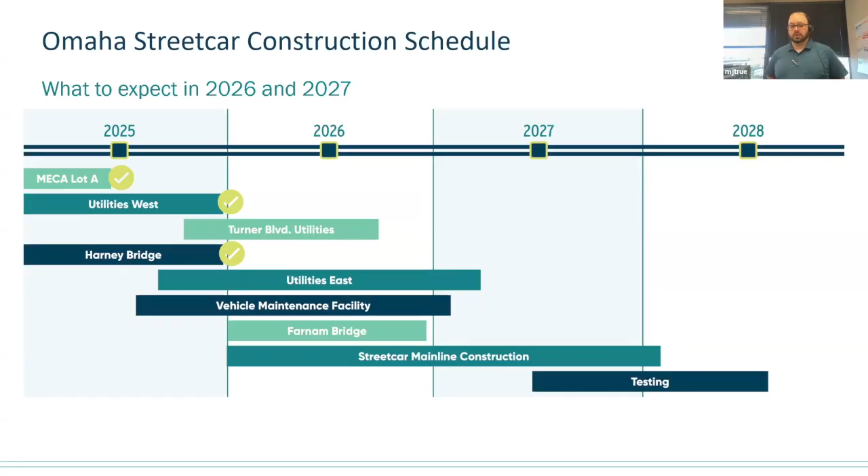So the overall construction schedule, you can see the Harney Street Bridge, Utilities West, and MECA Lot A. We've actually got 3 projects that have now been closed out. And as you can see, 2026 is going to be our busiest and heaviest construction year. You're going to have Turner Boulevard going, the Farnam Bridge going, and the vehicle maintenance facility still rolling right along. Utilities East, this is going to be the bulwark of what they do. And streetcar mainline construction, which we'll get into a little more detail, has kicked off 2 of its headings already as of right now. Towards the end of this year and into next, the actual construction portion will begin to phase out, and we'll be getting more into actually testing and integrating this system and getting ready for opening in Q3 of 2028. And with that, I'm going to be turning it over to Megan Walter with MUD.

Good afternoon, everyone. So, right now, MUD is currently working in Phase 5 along Farnam Street from 19th to 28th Avenue. MUD has completed all gas main installation along Farnam west of 20th. However, a couple of gas services still need to be investigated in this area. The remaining work includes new gas main installation on 20th once other utility work is completed. In addition, gas service work will be performed in the alley south of Farnam between 19th and 20th to relocate a couple of services off Farnam away from future streetcar tracks.

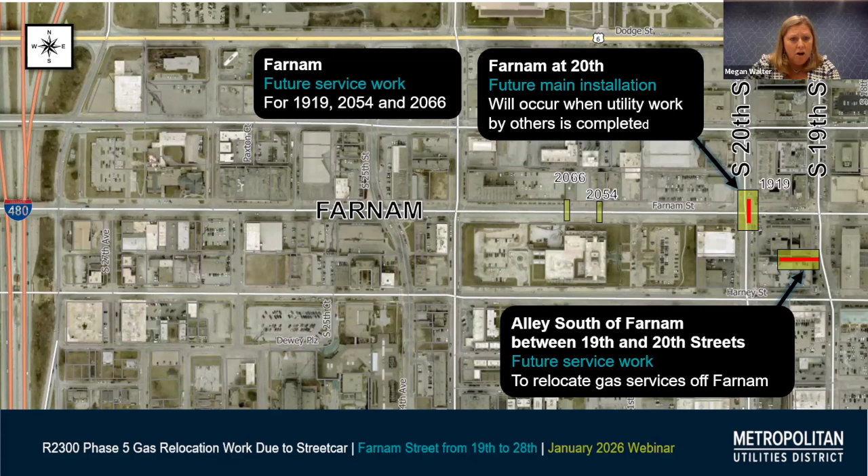Our next slide is related to Phase 8 in the Turner Boulevard area. Our crew has completed work along Harney Street and Park Avenue, and the city has poured the remaining concrete in the area. Traffic control will remain in place until work for one additional service is completed near 29th and Harney. We have two crews installing new gas mains in Farnam Street at Park Avenue and at 30th Street.

We anticipate this work to be completed within about 2 weeks. So the traffic control is in place. However, traffic in all directions continues to flow.

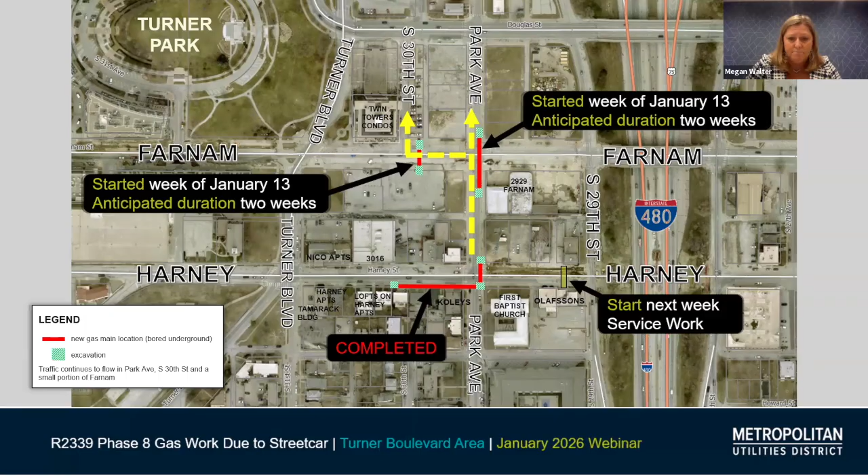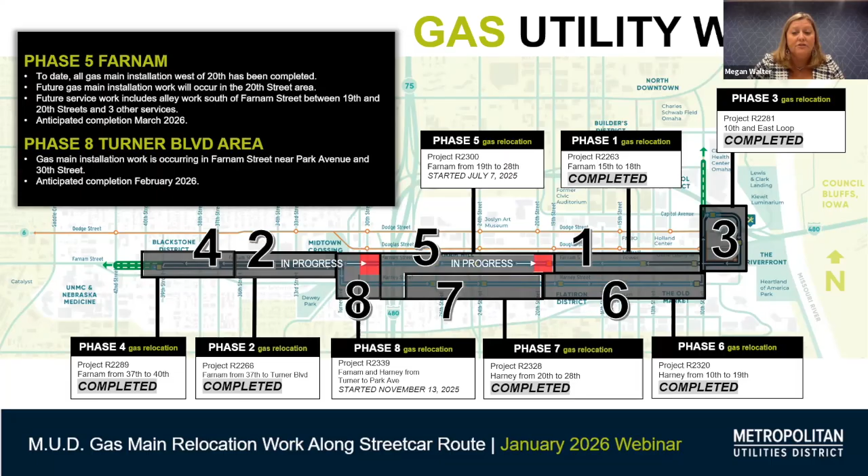Finally, our third slide has all of our work on it. It shows all 8 phases of MUD's gas relocation work. The remaining work is showing in red for phases 5 and 8. We anticipate all gas main installation and service work to be completed in the spring of 2026. Thank you.

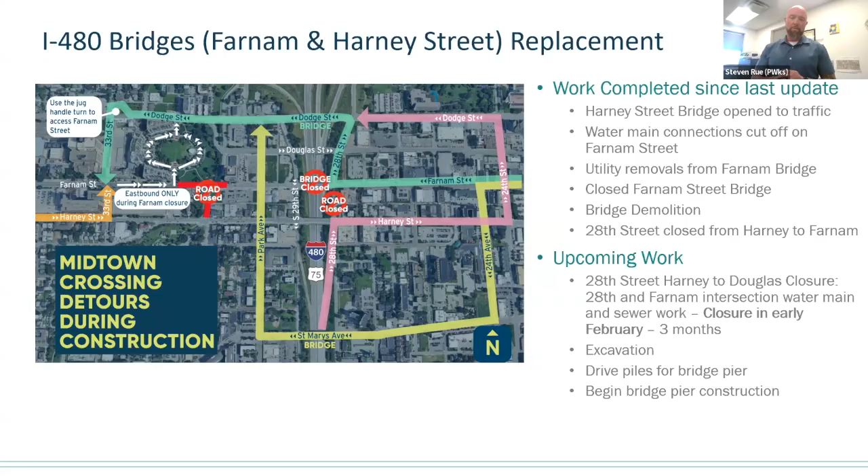Utilities East package. So we have the three big utility packages, right? We have West, and West is complete now. Kiewit's out there starting mainline work right now. We have the Turner package that we'll talk about after this.

And then we have this package, the Utilities East package. This is by far the largest package, largest footprint, largest scope of work. This is an immense package to get the water mains, sanitary work, et cetera done before we move in with mainline and make sure our infrastructure is acceptable for the future streetcar that's coming in.

We are working towards a full closure of 14th at Farnam for some water main work that has to happen there. That's going to close down the whole intersection while that work occurs. So going west to 13th or trying to come east to 15th, that'll be closed off there. Anticipate that coming up on the 19th.

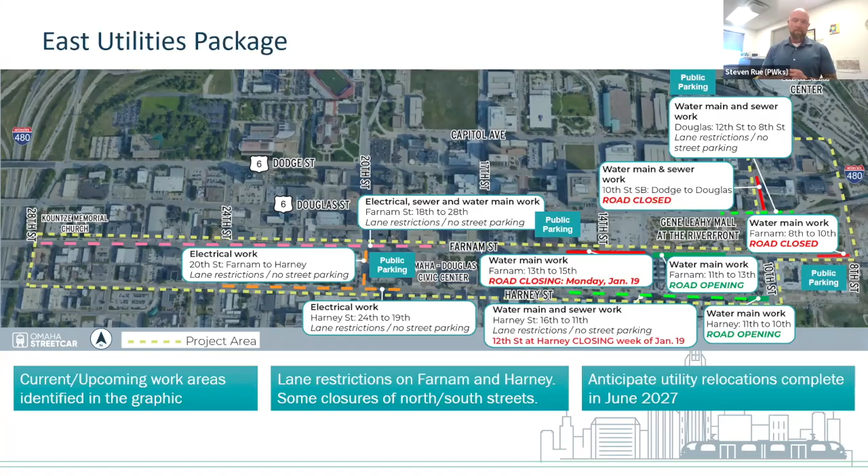On to the last project here, our Turner Boulevard project. In terms of the three utility packages, this is the smallest footprint, but some pretty complex work here. Right at Turner and Farnam, there's an extremely deep sewer manhole. We're going to excavate down about 35 feet.

The excavation itself is about 40 feet across, not counting workspace or whatever. So essentially you can envision that whole intersection there - half of it's going to be an extremely deep excavation. So what's that, a 3.5-story building deep?

And then the rest of that work area is going to be set up. The reason that intersection is closed is for the work area, and additionally for safety. With that very deep excavation there, it's about safety of the crew and safety of the traveling public. We cannot have people in that work area, so that's reestablished.

So that work has started. That's going to occur between now and the end of April. Right now, I think we have April 28th identified as the kind of finish date for that work. Obviously, that'll be weather dependent as we work through winter here. But long ways to go on that work right there.

Smaller footprint. Again, we show the same detour map with Turner being closed there. If you are trying to access that west side of Farnam, I would suggest using Harney. I think there's an option to use St. Mary's there. Use your wayfinding on your phone, obviously, is always a great alternative as well. But few routes to get around this little construction here with Turner and the bridges and get to that west side of Farnam.

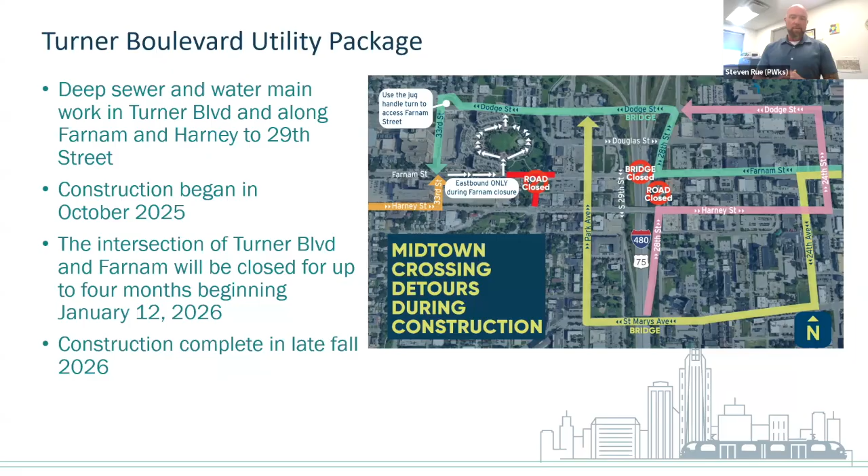So I think I touched on where we're at with that. I believe Mike is taking up the VMF and the mainline. Thank you, Steve.

Pardon me. We are into mainline construction work. On the exhibit in front of you, the orange area says January 2026. Then on the opposite, on the right side of the screen, there's a purple box that says January 2026 as well. That's the two headings we're kicking off - north side of Farnam, west of Turner. Kiewit's out there demolishing and removing concrete today. They've been out there saw cutting and starting to set up some of their traffic controls.

Other end, out around 10th and Capitol, we've seen some signs going up, and Capitol from 10th to 8th, somewhat of a curve down 8th.

They'll also be adding some more traffic controls in and around 10th Street. These are two of the tightest areas that we're starting in first, so hopefully the more challenging areas will get off on the right foot and be ready to run.

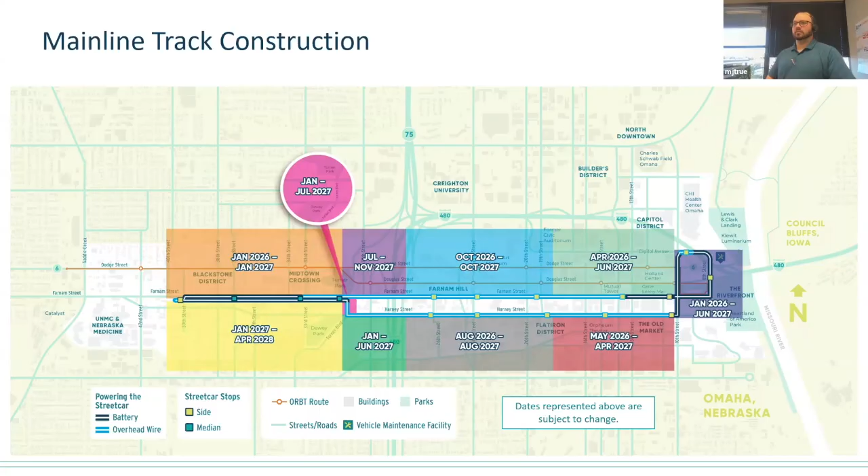A third crew is slated to come out here in quarter 2, bouncing down along Farnam and Harney, by the light green box and light red box, also towards the east end. First crew again is out there doing demolition, followed by a civil crew, which we can get into after this.

So first crew is demolition. Upper right corner, you can see they basically remove pavement and move anything out of the way in the work zone. They'll come back and add, where possible, these bridges.

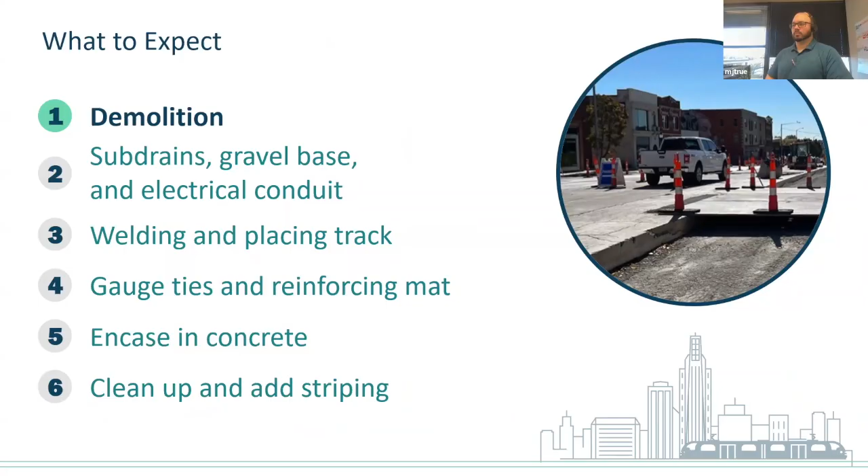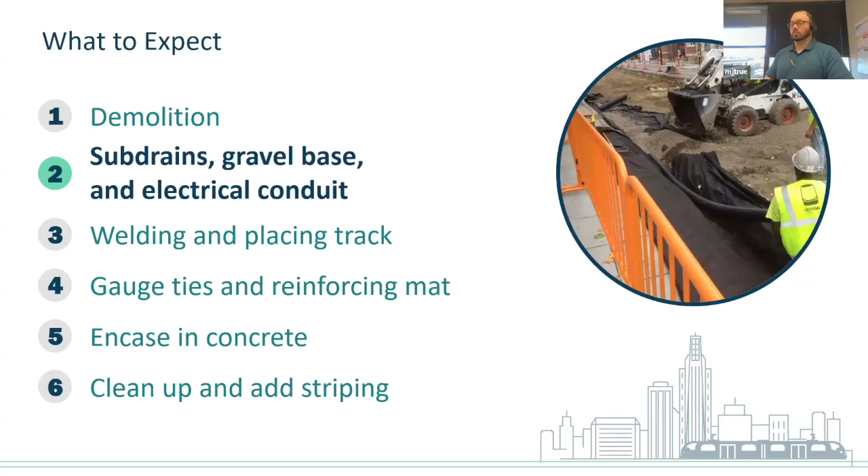Next comes a civil crew. They prep sub-drains, add electrical conduit, and add any communication lines as well. Then, usually while this is happening, a crew will show up here in late March where we're going to have actual rails stacked up.

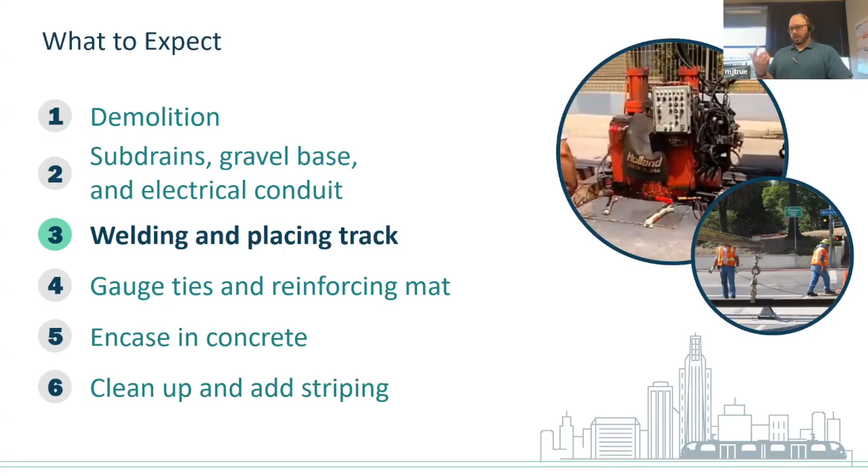They'll weld it up and place it. It comes in 80-foot sticks, gets welded into 320 to 400 foot long sections, and then stacked again on the roadside. While they're doing that, and after the civil crew is through, you'll have an actual skeletonization crew come in. They'll make the rebar form, a place to hold that track in place, and add any finalized drain tie-in points and anything else.

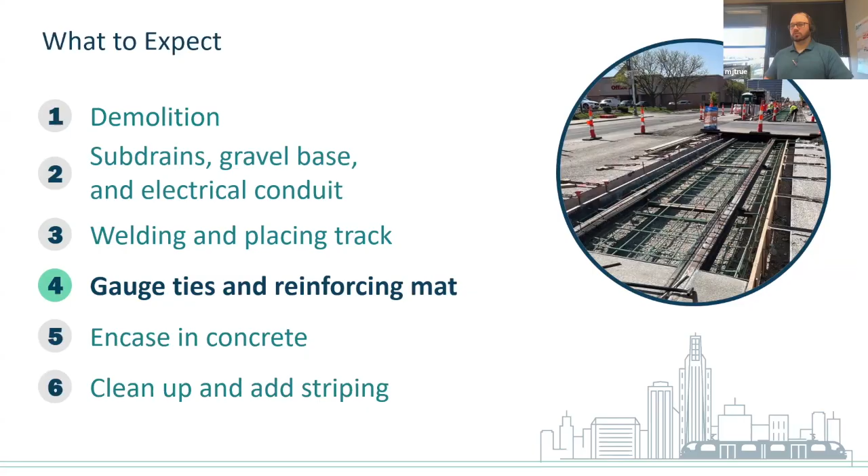That's followed by your concrete crew. As you can see in both the previous slide and this one, there are still those bridges coming across. As often as possible, the intent is to maintain traffic in this linear construction fashion.

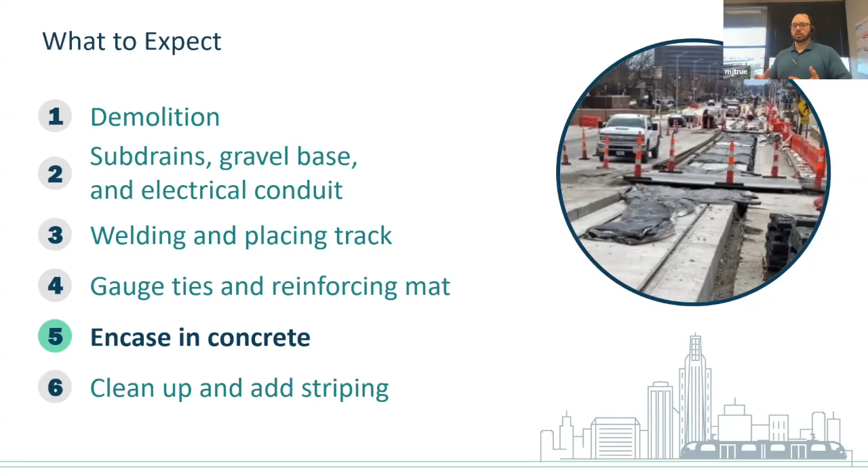There will be a need for closures at times when they're directly demoing out concrete, placing rail, and placing concrete. After your concrete goes in, you have a cleanup crew that comes out, does some striping, and puts back any appurtenances, benches, and so on. Also at this time, once the rail's in the ground, they'll get into the actual vertical work and putting in the particular stops.

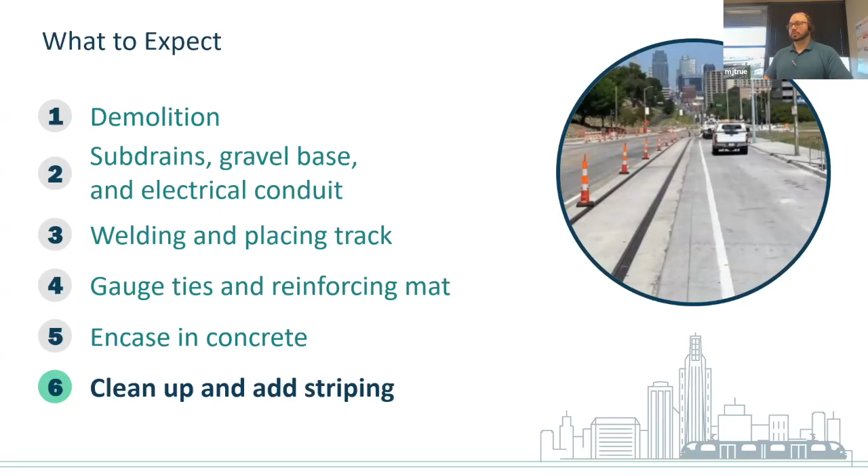And then if you want to go left on Dodge, I've done this a couple of days since they've shut this down. You come out, go up to Dodge, take a left-hand turn, or you can go south through 33rd and pick another way going back.

You can also, if that garage is starting to get full, which would be great, use another garage along Harney Street that can exit out onto Harney. And if you want to park more immediately where those businesses are on the south side, you can exit through Turner Park itself and out to Dodge.

Once the Turner work is done, we will have one continuous westbound lane maintained as they go through here.

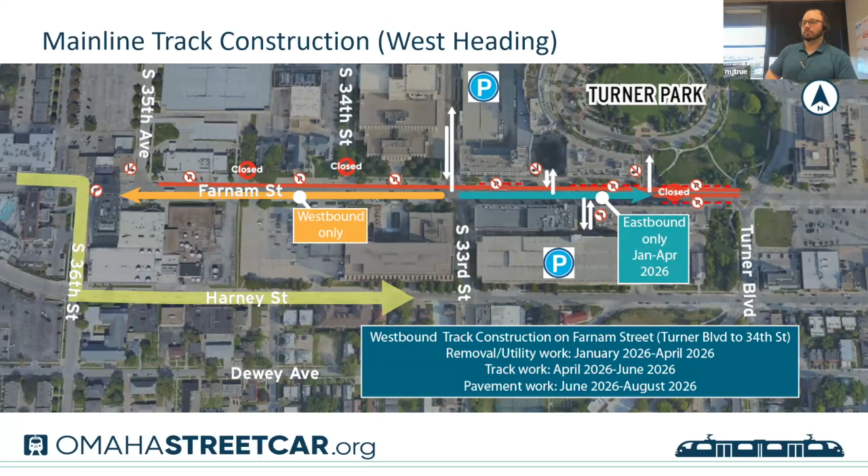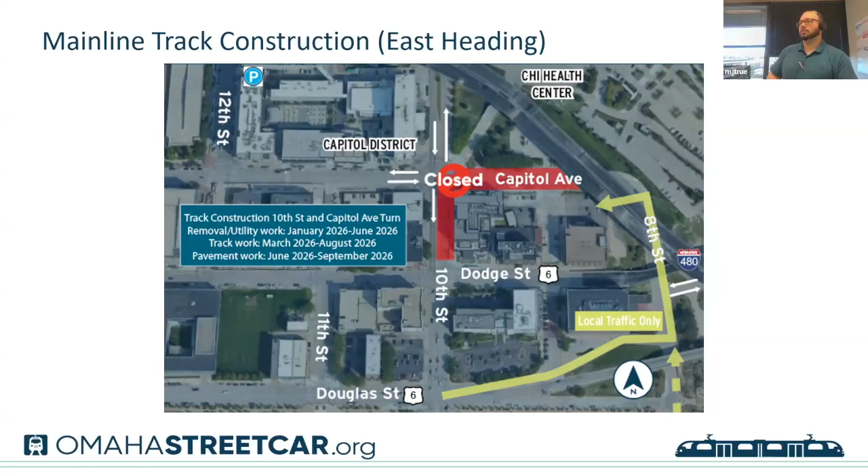So this is a little bit more complicated methodology because we're actually changing traffic flows, and we're also adding a lot of equipment here that's going to take some time to install.

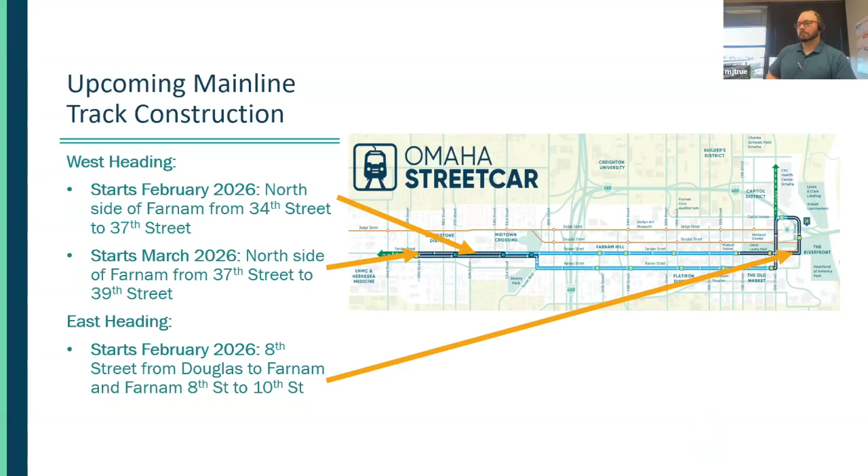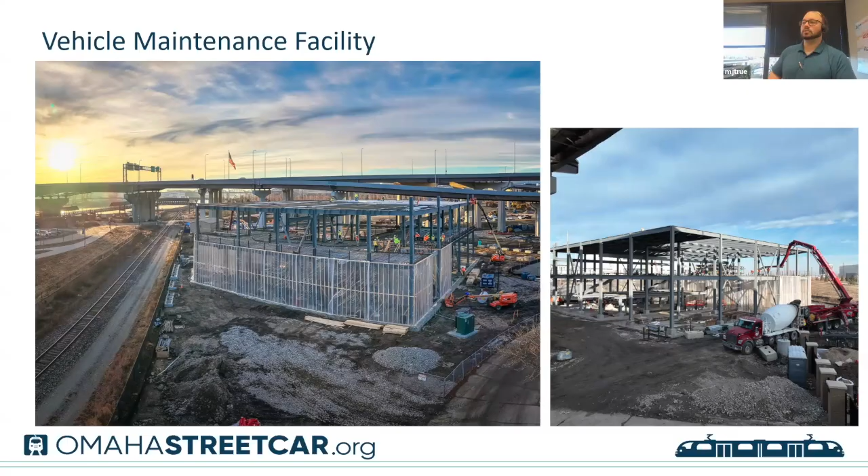The photo on the right shows you pretty close to where the front bays are going to be when eventually this is all said and done. But the one on the left, you can really see a nice sunrise there over 480, and that mezzanine level is where OSA will actually be housed when this facility is complete.

Business support. Normally this is covered by another member of our team, but just to give you a brief overview of what's been going on: there have been wayfinding signs, we're trying to have increased communications, whether through our social media, and we are working through with stakeholders as we go along, modifying traffic plans as necessary, particularly also for pedestrians.

Again, I briefly mentioned there's a couple of garages up in Midtown, and the first couple hours are free there. We are doing some business promotion, and one of the big business promotion ideas we're doing right now is the passport program. I'll hand that off to Alyssa to cover that in more detail.

Thanks, Mike. The passport program is active right now and runs through March 31st. This is a program where you can visit and support local participating businesses and collect a sticker. You can pick up those passports at any of the participating businesses. You'll see one of the big posters in their windows, and you can also find that information on our website.

If you are a business that hasn't had a chance to sign up yet with the craziness of the holidays and things happening, you can still sign up by visiting the website. There's a link on our website to sign up.